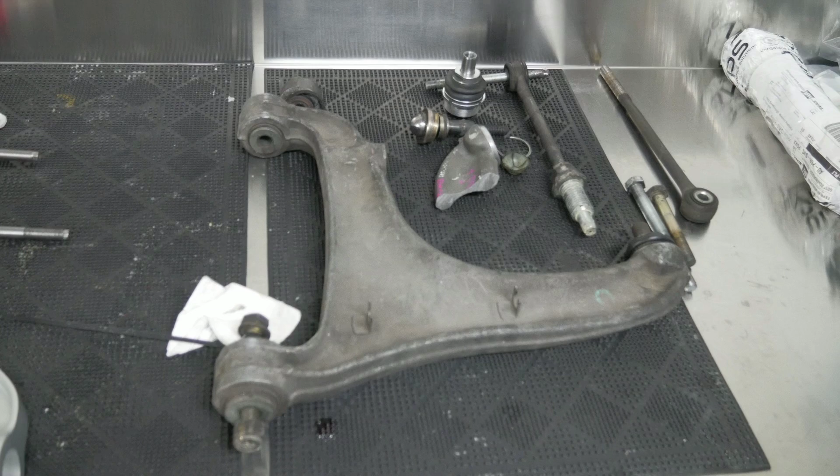It is now the day after filming. My friend who has been helping me out has gone home, and for that reason the quality of the video has probably dropped off. It takes about 10 times longer to film a job that you're doing than it does to just do it. It only really takes about 2 hours to change those control arms, but by the time you line up all the different shots, it can take a lot longer.

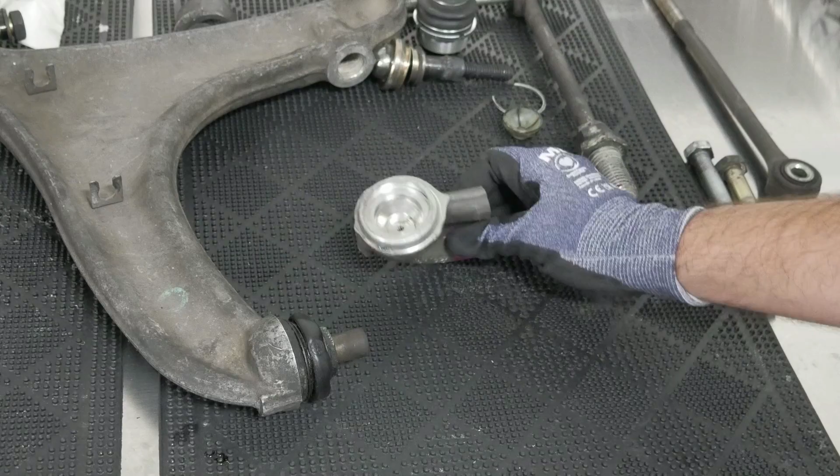But this is the bit that I really find interesting personally. I want to discuss how these original arms were designed and manufactured, the problems that it's caused, and the decisions behind why I resolved it the way that I did. Let's start with the main issue that these arms have, which is this ball joint here. Having a look at this ball joint, it doesn't look particularly unusual, but when you have a look at a cutaway of the arm, you'll see here that we have this other rather unusual cutout.

This here is a cup, which would sit in here, and the reason it would sit like that is because the ball joint uses the arm itself as the seat. This was then press fit into the arm, and this little piece of metal was pinned across the top of it so that it would maintain its position. This introduces a few problems. The most obvious is that if this ball joint fails, the arm is scrap, since it is integral to the arm. It is the arm.

The second is the cause of failure. Most people will tell you that you need to get these rubbers inspected since they're the cause of failure, but they have nothing to do with it. Sure, if these fail, the arms will fail sooner, but these arms will fail regardless, and they will always fail prematurely compared to a conventional ball joint because of the way that they're arranged.

Conventional ball joints are typically arranged in compression or tension, but these arms are arranged in compression and tension. Every time the car accelerates or presses the brakes, this ball joint will load up in both directions. The problem is that you can only design the ball joint to be rigid in one direction. As you can see, this is press fit, and what that means is that once this joint is in tension, it has the chance to pull this ball joint even a fraction of a millimeter out. Once that's done, there will be play that can never be rectified.

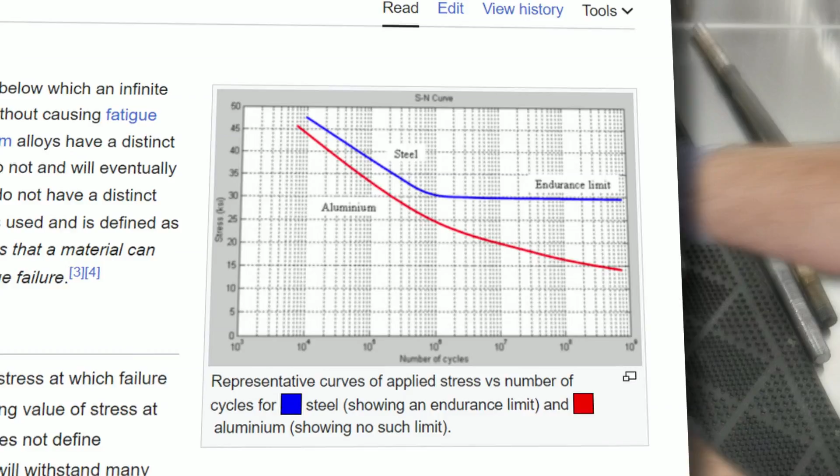What's most likely happening is that just over several cycles, these are pulling forward a fraction of a millimeter, introducing play that can never be fixed. So that's why these ball joints are a big deal. Once they're gone, they're gone.

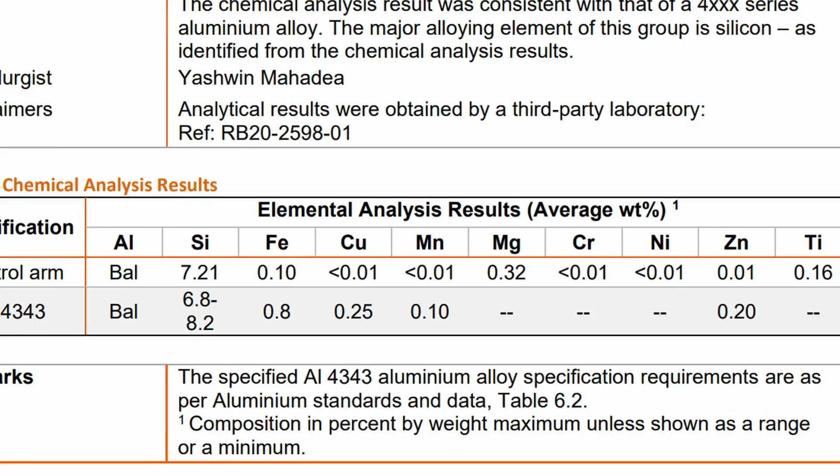Moving further on to the body of the control arm. I sent a sample of this material out to a lab, and it is a grade of aluminium called 4000 series. I can't remember the exact grade, but it'll be on the screen as well as the full material readout. One of the interesting things about that material result is that a lot of people assumed that these were forged. There's no evidence at all of any surface hardening features, which indicates that these are in fact a casting. Judging by the quality, they're probably a die cast, but it doesn't really matter.

What that means is that there is a casting seam along the body, and this becomes a focal point for stresses since there is no tension in the surface to try and maintain this seam. That becomes relevant when we get to the bushings.

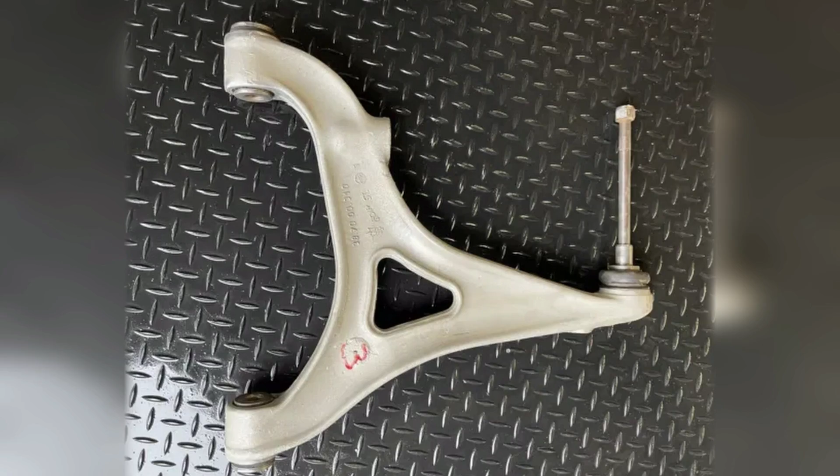Another thing to keep in mind is there are two versions of this control arm. This is the later model, which is heavily reinforced. There's no cutout here in the center section, which you can see in the older arm to reduce weight, and more importantly, there is no reinforcement around these bushings on the older version.

A good thing to know is that manufacturers, OEMs in particular, will not change a design unless they have to, because it's a very expensive exercise. So that tells you that Maserati knew that there was a defective by design issue with these control arms. So let's look at these bushings and assess the problem there.

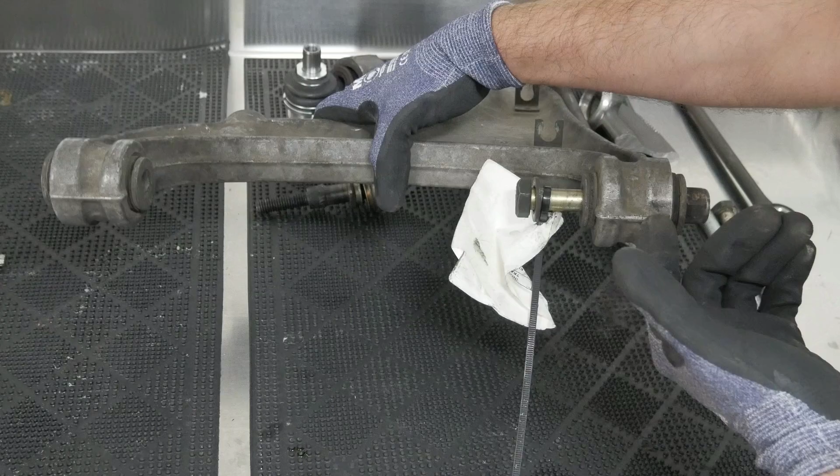You can see here the casting seam. Now, though the casting seam is obvious on the outside, that casting seam is continuous through the entire body. It'll be on the inside where it's machined. It may not be visible, but there will be a seam in the crystalline structure of the metal. When you press the bushings in, they are press fit and they provide tension outwards.

Combine that with many cycles and bumps and the fact that aluminium has unusual properties with its endurance limit. What this means is that you end up with a situation where a fatigue crack can propagate through the material, through to the thinnest point, which is effectively here. Even on these reinforced arms, they do have a tendency to form cracks here. On the older arms, they're known to just spontaneously fail from cracking.

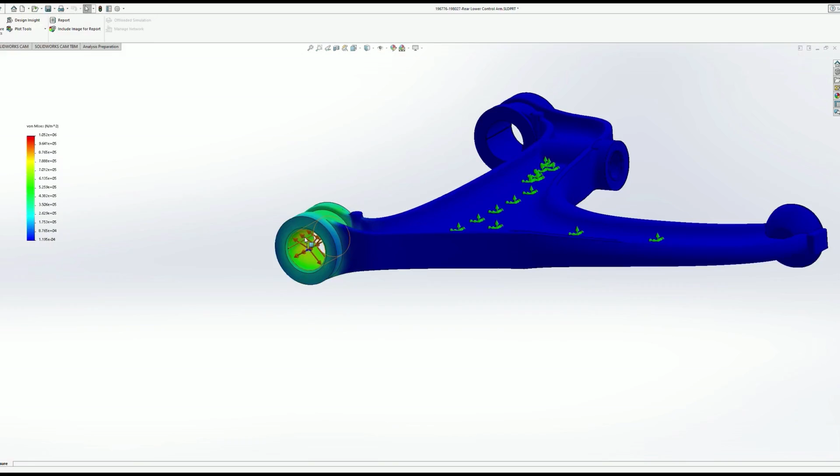Now, the reason for that is multiple. The lower arms do all of the heavy lifting, not the upper arms, and I've got some results that can show that in a bit. But I just want to show why they fracture along that seam. So what I've got here is a force applied outwards from inside the control arm. It's only a small force, and definitely nothing close to the limit for this material.

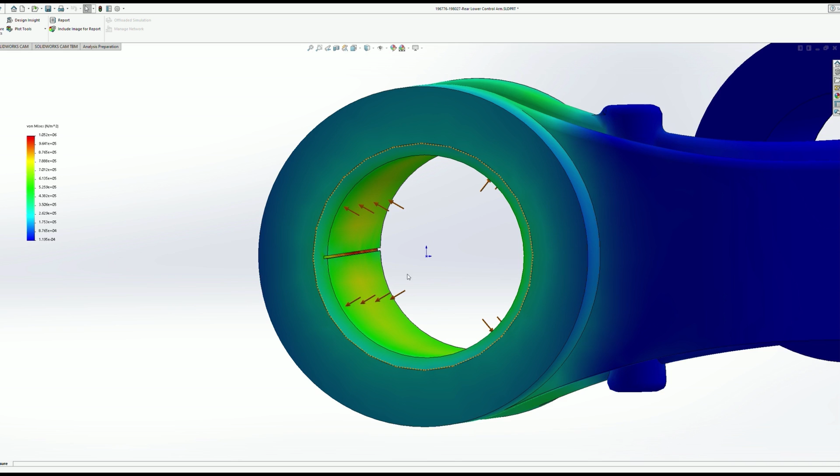And what I've gone and introduced here is an imperfection in the surface. That's a 0.5 millimeter deep imperfection, and it's only on the surface. Now, the reason it's like that is just to show that the stress can focus. So you should all be able to quite clearly see that there is a focal point for the stress. And again, this is well and truly below the limit of this material. This is just for illustrative purposes.

But what you should take away from this is that on that casting seam, there will be imperfections in the crystalline structure because of the casting process. And with a force applied outwards, that will change and cycle from temperatures as well as the arms moving up and down. There will be a focal point for all of that force into this center point here.

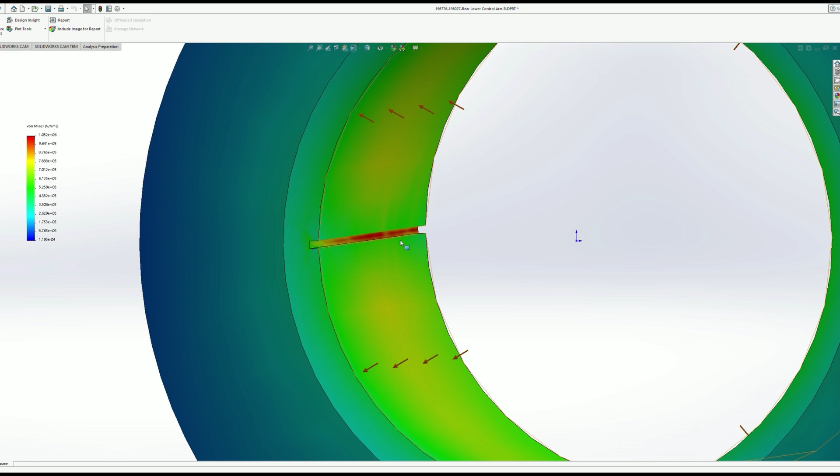So every time you try and rebuild these arms, you're going to have to push out the old bushings and push new ones in, and that will be a high stress cycle, and that will increase the chance of fatigue. So that matches the experience people have had when they've tried to replace the bushings, that they'll often crack during that process. And if they don't, then I think you're really just running the risk of them cracking while they're on your car.

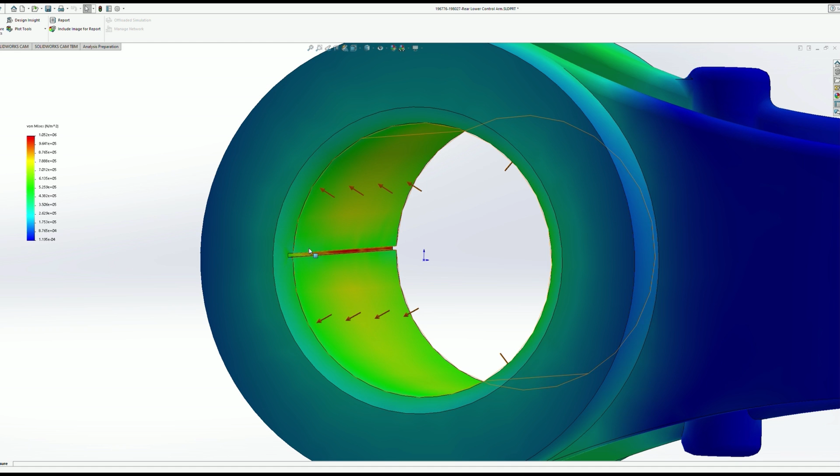And that was a reason why I didn't think the OEM arms were suitable for rebuilding and were only suitable for replacement, is that the evidence is there from the real world that they do fail along this point here. The bushings aren't actually bushings, though I've been referring to them as bushings. They're what's called a flanbloc. This is a cutaway of one. I've literally just cut it in half in place.

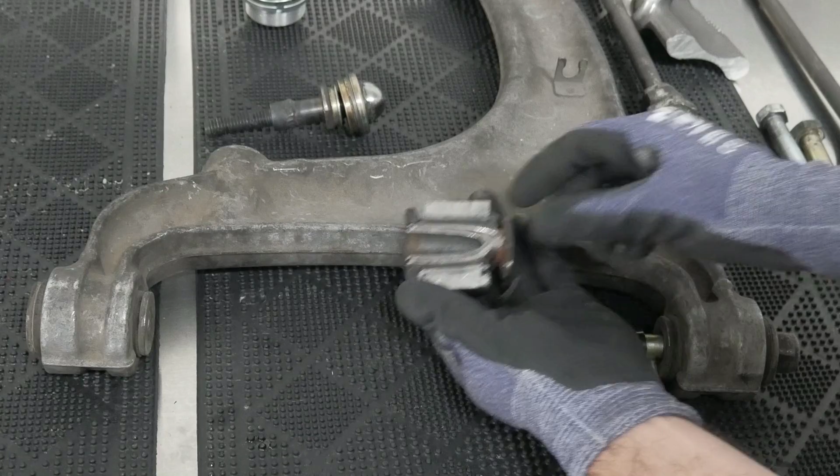You can see the control arm here. You can see a metal sleeve, a rubber layer, and then two inner metal sleeves. Now, this is seized in place from corrosion, but when these are new, this can actually rotate freely. There's another disc on the other side. So it's effectively a bearing with a rubber isolator. So these two inner sleeves rotate freely against each other, and the rubber isolator helps with a bit of NVH.

The reason that this is done is it gives you a good middle ground between a bearing in your control arms, which have very harsh NVH and they don't have a very long life expectancy because of the direct contact that they have, compared to rubber, which can absorb some degree of vibration. But you can see quite clearly there's not a lot of rubber in there, so you would be getting quite a lot of vibration and force into these control arms.

With all of these things in mind, I originally considered rebuilding these. The first problem that I had with rebuilding these starts at the ball joint. These are the ball joints that I used, and these ones are threaded body. Firstly, you can't use a steel threaded body into an aluminium threaded body.

The material properties to do with the endurance limit effectively mean that you can really only tighten it 2 or 3 times and then it'll start pulling out pieces of metal. If you've ever worked on an aluminium block on an engine and you pull out some studs, a little piece of metal will always come with them. That's why. It's a material property of aluminium. It's completely irrelevant what grade of aluminium it is, it will happen.

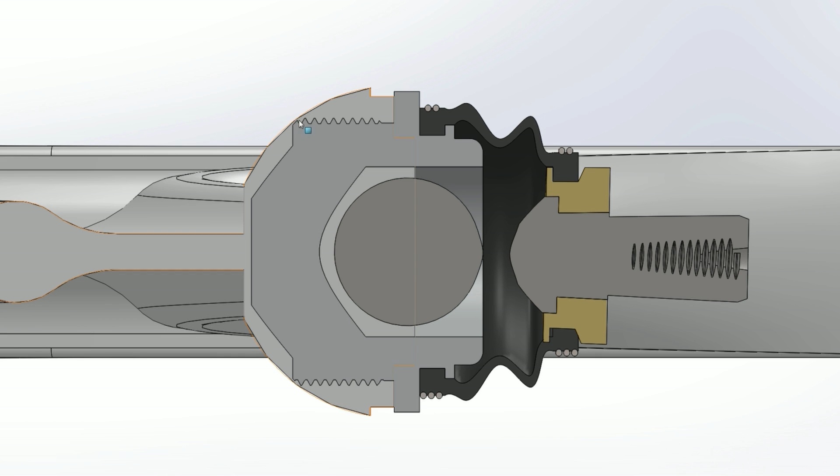So if I wanted to rebuild these and cut a thread into it, I might be able to do this a couple of times, then the arms will be completely trash anyway, at best. Then, if you have a look at the depth that this goes into, if I removed the threads and tried to press fit it, I would be left with very little material on this, and the FEA confirmed that there would be substantial amounts of stress in this area here. I'd be quite concerned about fractures around a press fit here.

The short version is it becomes very dangerous very quickly to do a press fit on something like this without doing the correct analysis. So just on this piece alone, I wouldn't have been able to proceed with a safe rebuild of these arms. Moving back here, because these are prone to failure just with the standard bushings as they are, while they're in the car, this is just not a safe thing to rebuild.

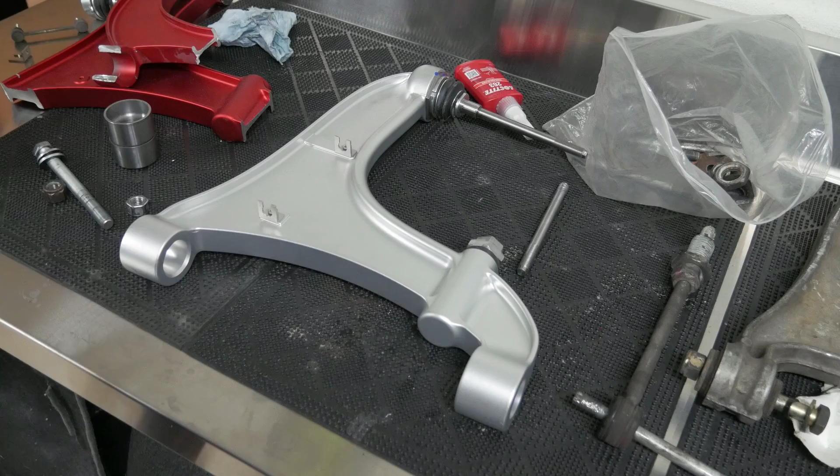I've heard of people trying to replace these bushings, and during that process they've split these arms. There's really no point trying. It's just going to be a waste of time, and if I do succeed, it's very likely that there's going to be hidden or invisible cracks in here, and then there's going to be very high risk of fatigue cracking up in the ball joint as well. It just wasn't a safe way to proceed, and that's why I decided to make my own arms from scratch. So let's have a look at what I did with those. We'll start at the opposite end and work our way up to the ball joint.

For the bushings, I recommend using OEM bushings, or flanblocs, as I should say, or urethane bushings, since urethane won't swell quite the same way that rubber bushings do. These parts are made from billet, so they do not have a casting seam, and as you can see, they're further reinforced even compared to the late model arms. Since they're made out of a single piece, it's actually cheaper in terms of manufacturing time to just do a single pass like that instead of to use less material.

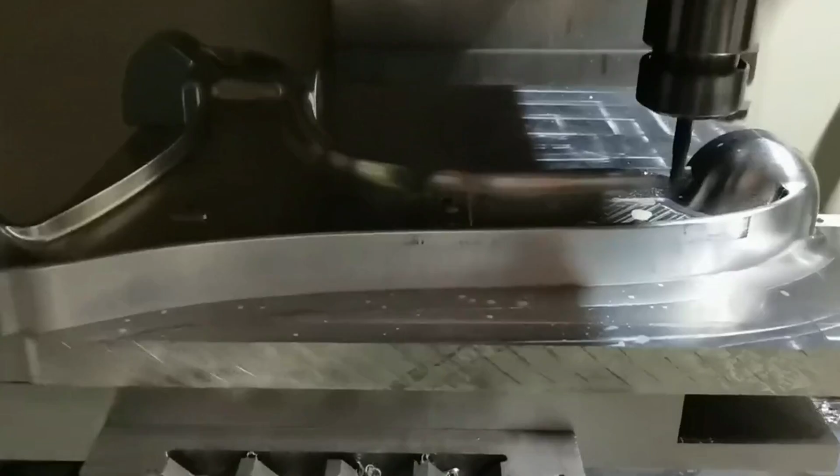Since I'm removing material to manufacture this, whereas the OEM arms are adding material, they were trying to save money by making a smaller casting. In this case, it allows me to make these more reinforced effectively with no cost penalty compared to making them a direct copy. With this thicker material here, and no point for fatigue to form, using the correct bushings, these will be serviceable for a much longer period of time.

Another difference with these arms is the concerns of the mechanic. The bushings in this case insert from this side and can be easily pulled through using a bolt, which is shown in the assembly video. This allows these bushings to be pushed out easily at a later date when this arm is intended to be rebuilt. Not something that is easy to do with the OEM arms. You need special tooling to reach to be able to push the bushing from the inside, whereas you can just sit this on a press and push it from both sides without any trouble.

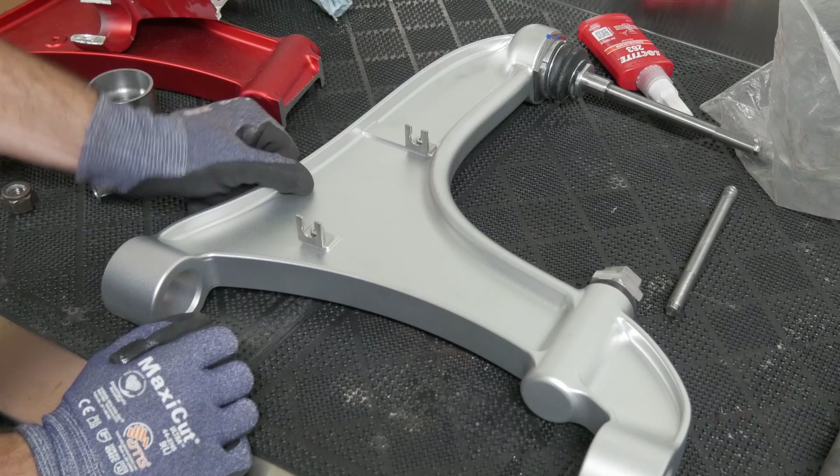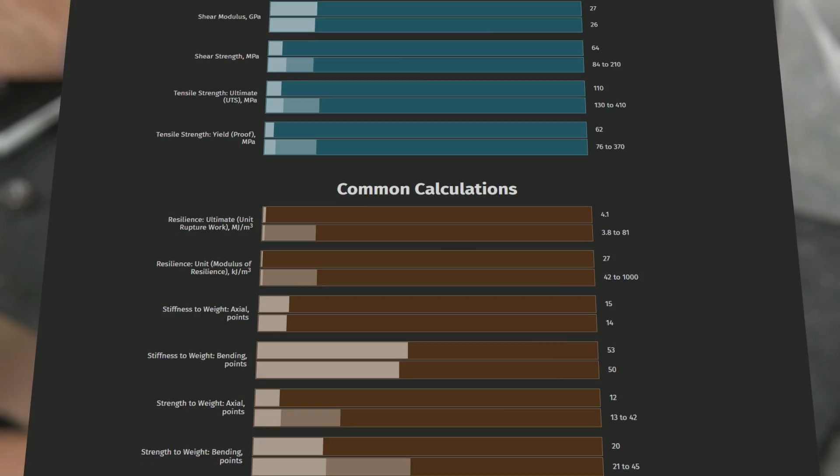Moving into the material, this is 6061 T6 aluminium, or a 6000 series aluminium. This is a much stronger material. There should be some data on the screen now showing you a comparison between the 4000 series that the OEM arm is and the 6000 series that this was manufactured from. What this means is that I could technically make these substantially lighter than the OEM arms and still exceed their strength. However, I've chosen not to do that.

At the completion of the FEA, I have instead decided to focus on making these substantially stronger than the OEM arms, which is also why this little raised section is here. The FEA showed this as a point where stress was building up, so I decided to introduce that as another reinforcement.

These arms have a calculated factor of safety of 20. What that effectively means is that the expected stresses that these are to see, these can see approximately 20 times that stress level.

The final step in making sure that these arms were safe to implement was to contact an automotive engineer in Australia and get their advice on making sure that these control arms met the Australian design rules. Now, the Australian design rules are for modified vehicles, and these arms are OEM replacements, so they don't technically need to meet those guidelines, as they're substantially more stringent and onerous than what would have been put on the OEM.

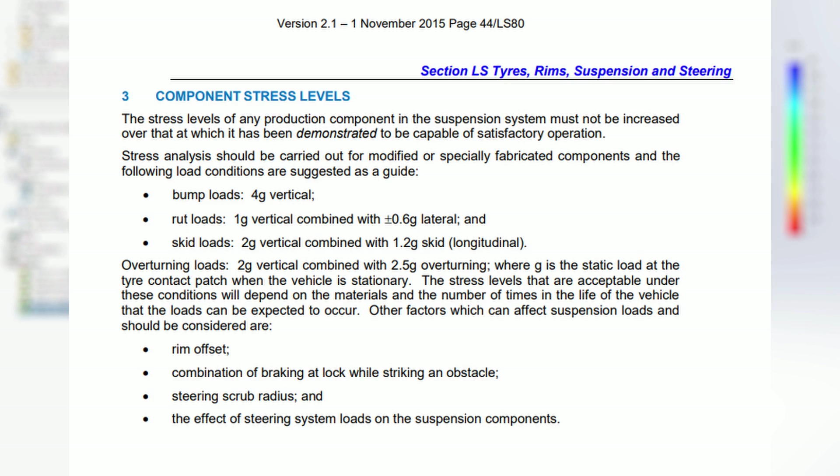However, I thought it would be good to compare them to the ADRs, which should be up on the screen now, and these results were sent off to an engineer using an analog model of the upper and lower control arms, so the whole assembly, and these were put under incredibly excessive loads up to 20 kilonewtons in some directions and 50 kilonewtons in others.

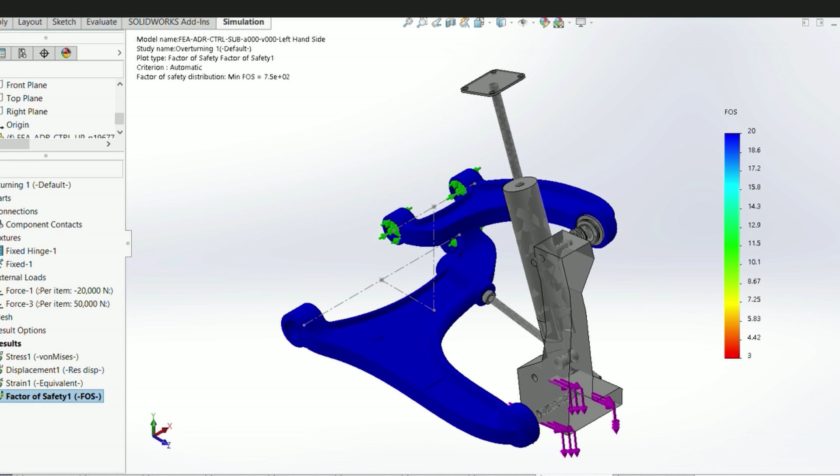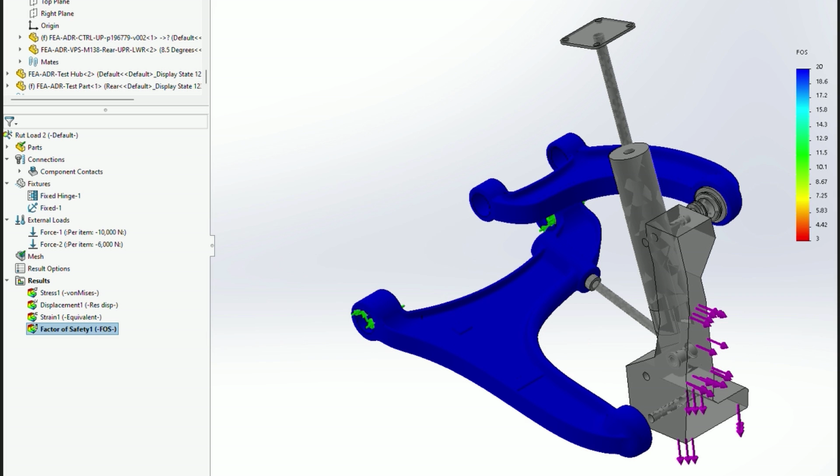So in these scenarios, the lower arm is doing almost all of the heavy lifting. You can quite clearly see it's the only element that's experiencing any real stress. However, in all cases, the factor of safety exceeds 20 in this real world analysis. Since they're aluminium, they will eventually fail, but that should be well outside of the lifetime of the vehicle, or at least my lifetime, so I'll be long dead before it becomes a problem.

The insert for the toe adjustment here is made out of 316 stainless steel. This is to assist with corrosion, preventing this from being adjustable in the future. Combined with anti-seize, these should have a much longer life expectancy than the original parts. Moving forward to the ball joint.

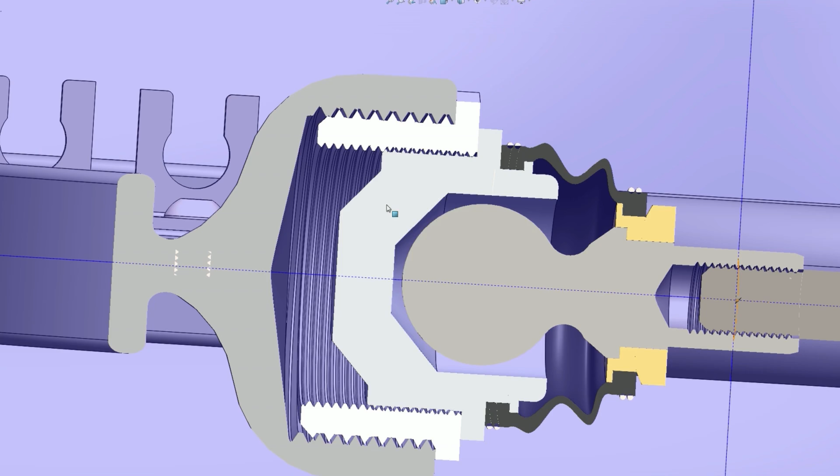As I said previously, I cannot reasonably reuse this area if I thread a steel-bodied ball into an aluminium receptacle. So as discussed in the assembly video, I use a steel sleeve, which is permanently affixed into the arm, which allows me to repeatedly remove and install ball joints. Anticipating the replacement of these ball joints due to the nature of failure, this seemed like the best option to maintain the serviceability of these arms into the future.

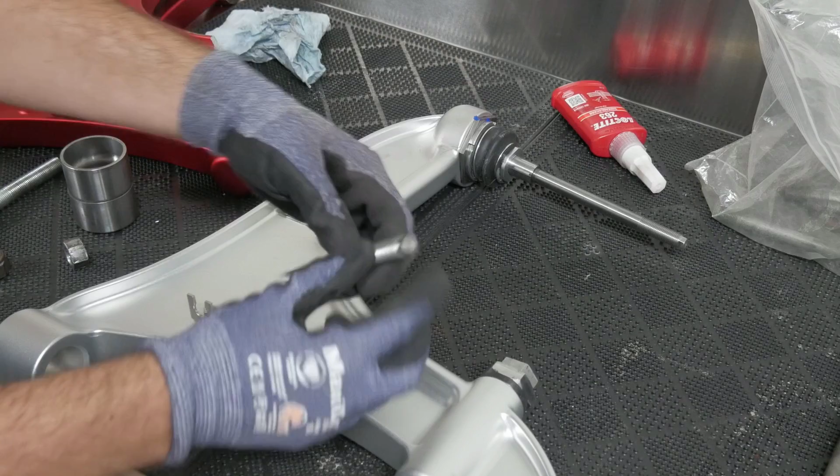And as shown in the install video, these studs have been manufactured as part of the arm to make them more serviceable than the OEM component, simply because they have a stud on them, have a hex on them for a socket, so that they can be easily removed when the arm needs to be removed.

For comparison, this is one of the OEM toe adjusters. I wasn't able to remove the stud. This is the one from the installation video, so I needed to use a stuck bolt extractor, effectively destroying the stud as part of its removal.

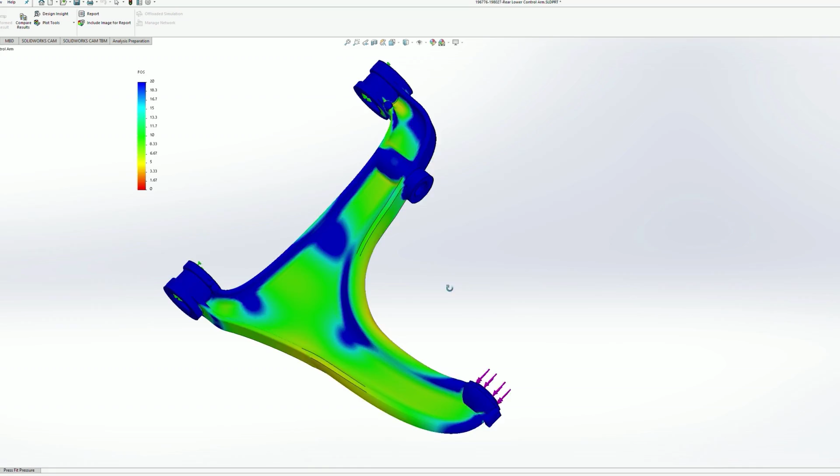What we're looking at here is a factor of safety plot from 0 to 20. If it's blue, it's 20 times the load that I specified. Now, that load was just arbitrary. It was picked not because of any relationship with the vehicle. It was just as a method of setting a benchmark for the performance of the original arm.

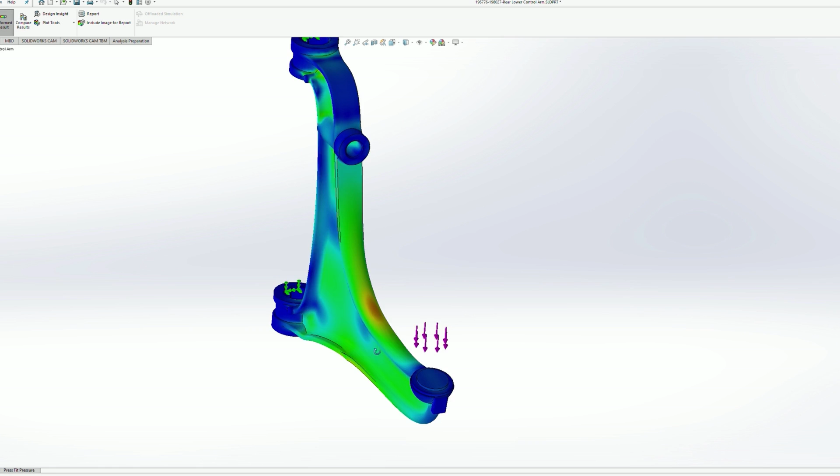Using that, I was also able to view where stresses were building up within the arms, and you can see that there's a point across the longest section where there is a relatively high stress, or rather a high stress focus. Moving on to the arms that I've built.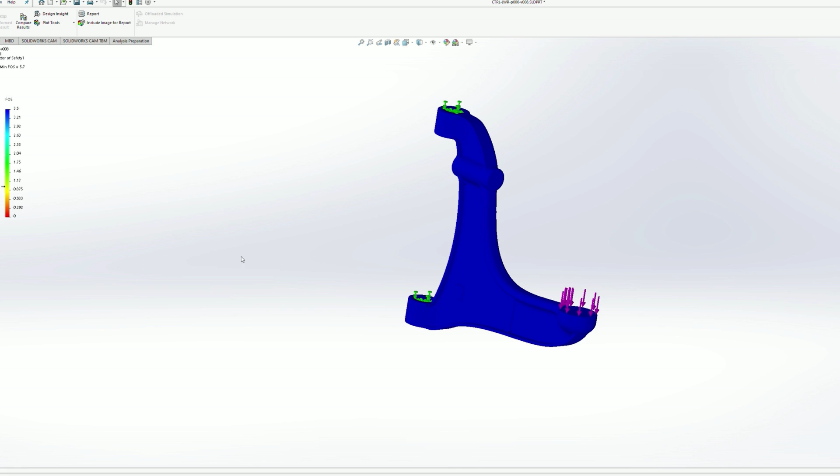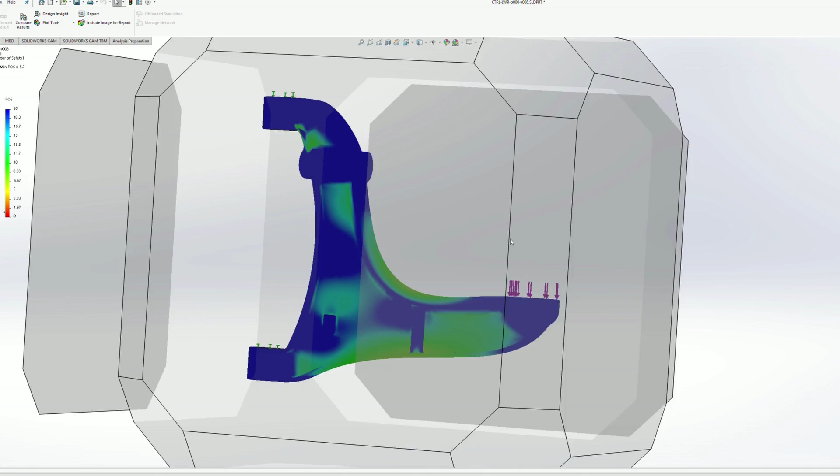Using the same scale, you can see that this arm is experiencing very little stress. In the same factor of safety plot with the same loads, this model is well and truly capable of meeting or exceeding the performance of the original arm.

If I look at stress, you can see that there is lower degrees of stress through this arm and that it is more evenly distributed. One of the ways that I was able to achieve that was just making this section here slightly thicker, following on from the results of the original arm.

Hopefully that answers most of your questions, and hopefully this has been edited with some nice pictures, not just me talking blandly over some bits of metal on my desk, and I hope this helps solve a lot of the problems you have in the future.